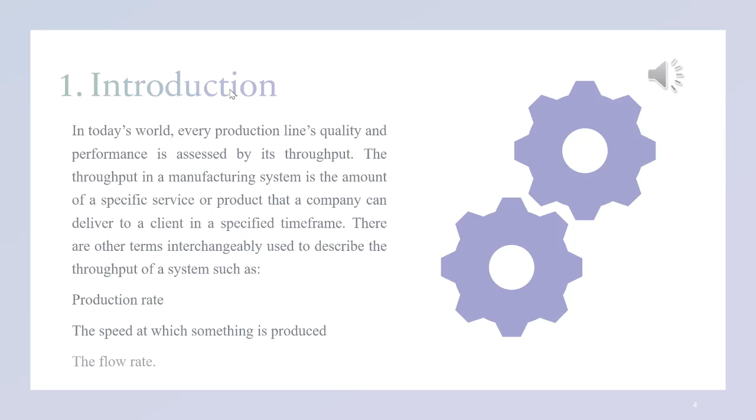The throughput in a manufacturing system is the amount of a specific service or product that a company can deliver to a client in a specified time frame. There are other terms interchangeably used to describe the throughput of a system, such as the production rate, the speed at which something is produced, and the flow rate.

Well, given that the goal of the production rate of a line is maximizing the revenue of the company, and it is crucial, Benjamin and I as a group decided to study the theory of constraints applications in production lines and try to present a new point of view in maximizing the performance of the line.

Here, we get to know different types of bottlenecks in a system as well as how to combine lean manufacturing and theory of constraints methods, using some lean manufacturing tools such as Kaizen, Jidoka, Gemba, TPM, SMED, and so on to identify and eliminate the constraints, and maximize the total output.

Now we are going to understand the exact meaning of throughput. Production capacity of a company is closely related to production rate, and a business manager can make a number of assumptions about the throughput of the system. On paper, a company can reach the maximum capacity, assuming that the line will operate continually and without any interruptions, but in the real world scenario, it is not possible.

Over the years, in a production line, machines will fail and need to be repaired. There will be changes in the personnel of the factory and the learning curve alters over time. There are always maintenance and overhauls needed after a certain amount of operation time, and there will always be some supply chain shortages in the line that will lead to wait time.

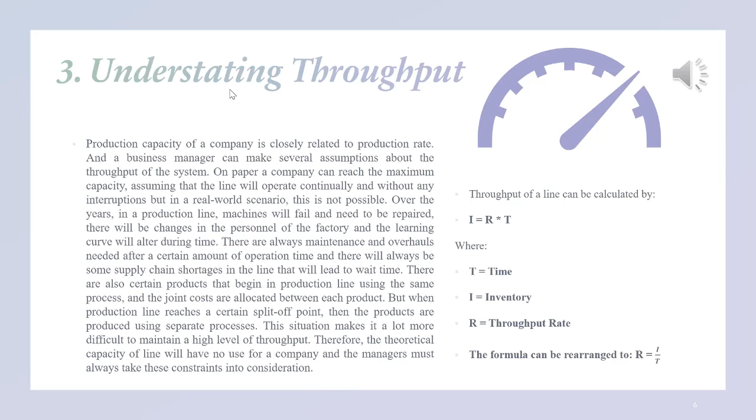There are also certain products that begin in the production line using the same process, and the joint costs are allocated between each product. But when the production line reaches a certain split-off point, the products are produced using separate processes. This makes it a lot more difficult to maintain a high level of throughput. Therefore, the theoretical capacity of the line will have no use for a company, and the managers must always take these constraints into consideration.

The key concept of this theory is that every production line has a single bottleneck, and the total production rate is affected by that constraint in the line. Consequently, when that constraint is eliminated from the line, the total line throughput could be improved. Thus, spending time on optimizing the non-constrained parts of the system is not very beneficial, and only improvements on the weak links of the system will improve the overall efficiency.

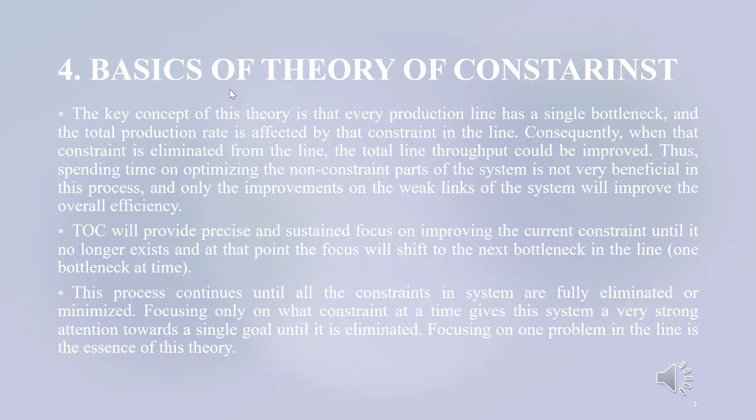TOC also provides precise and sustained focus on improving the current constraint until it no longer exists or is at its minimum state. At that point, the focus will shift to the next bottleneck in the line. This process continues until all the constraints in the system are fully eliminated or minimized. Focusing on only one constraint at a time gives the system very strong attention towards a single goal until it is eliminated. But first, we need to find out the main characteristics and also the benefits of TOC.

One of the most appealing advantages of TOC is that it always prioritizes the improvement activities, and in contexts that need urgent improvement of the line, TOC offers a very rapid method for improvement.

Continuing, if this method is implemented successfully and correctly, the following benefits will be achieved: increased profit, which is the primary goal of most companies; fast improvement, which is the result of full attention and focus on the most important bottlenecks of a system; improved production rate, since by eliminating the bottleneck from a system the throughput always increases; and reduction in lead times, since eliminating the bottleneck results in faster production flow and eliminates inventory.

And now I'm going to take a deep look at the theory of constraints. It is a methodology for identifying the most important limiting factor, I mean constraints, that stands in the way of achieving a goal and then systematically improving that constraint until it is no longer the limiting factor. In manufacturing, the constraint is often referred to as a bottleneck.

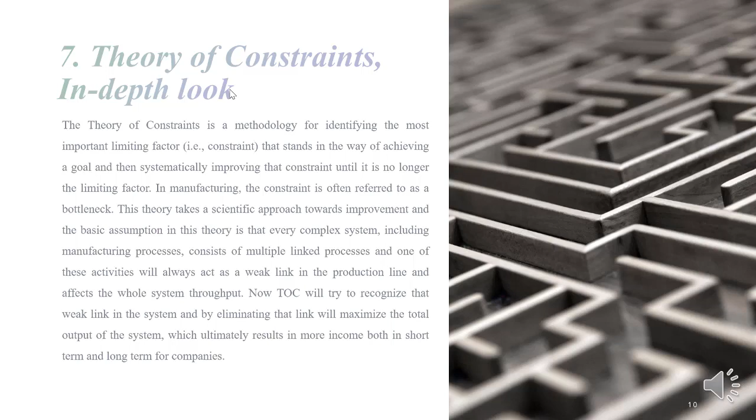This theory takes a scientific approach towards improvement, and the basic assumption in this theory is that every complex system, including manufacturing processes, consists of multiple linked processes, and one of these activities will always act as a weak link in the production line and affect the whole system throughput. Now TOC will try to recognize that weak link in the system, and by eliminating that link will maximize the total output of the system, which ultimately results in more income both in the short and long term for companies.

There are five steps focusing on theory of constraints. The first step is identifying the weakest link, I mean the most important constraint. The second step is exploit the constraint. It means that you can think about the most effective and quickest way to improve the constraint.

On the third step, we subordinate everything else to the constraint. It means that we need to review all of the activities of the line to ensure that everything is aligned with the constraint. And at the fourth step, we elevate the constraint. It means that if after all the three steps before, the constraint in the line still exists, then we need to consider further actions to remove the constraint. And for the final step, we need to repeat these steps again.

The sophisticated problem-solving method used in the theory of constraints is called the thinking processes. This method is optimized for complex systems with many interdependencies. They are designed as scientific cause and effect tools which are applied to first identify the root cause of undesired effects, UDEs, and then removing them without creating new ones.

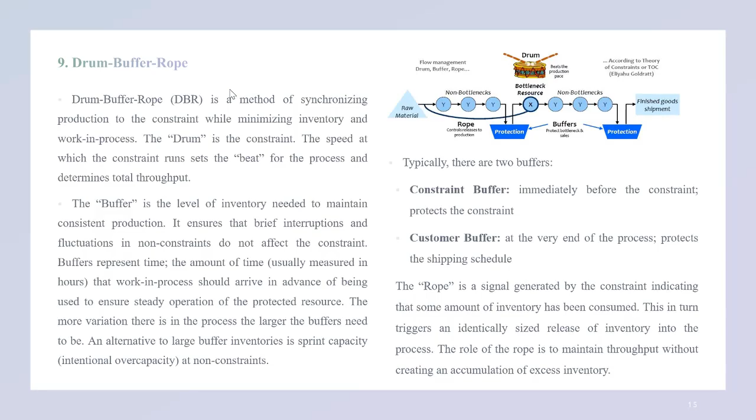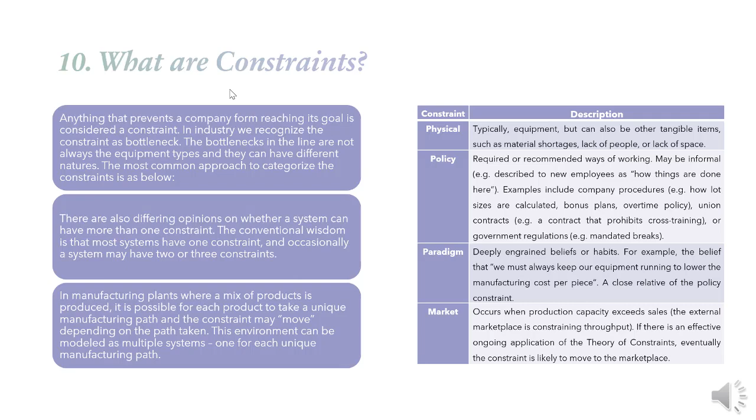Okay, anything that prevents a company from reaching its goal is considered as a constraint. In industry, we recognize the constraint as bottleneck. The bottlenecks in the line are not always the equipment types and they can have different natures. The most common approaches to categorize the constraint are as below. As you can see, it is physical, policy, paradigm, and market.

There are also different opinions on whether a system can have more than one constraint. The conventional wisdom is that most systems have one constraint and occasionally a system may have two or three constraints. In manufacturing plants where a mix of products is produced, it is possible for each product to take a unique manufacturing path and the constraint may move depending on the path taken. This environment can be modeled as multiple systems, one for each unique manufacturing path.

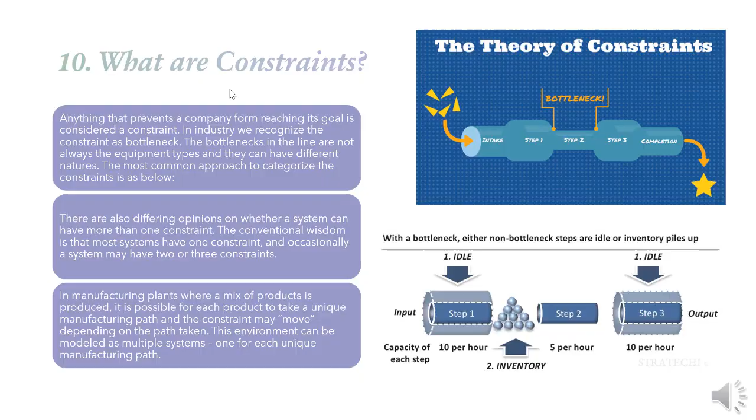Well, now there is an example of applying theory of constraints in reality. It includes 5 steps that I mentioned before, including identifying the bottleneck, exploit the constraint, subordinate and synchronize to the constraint, elevate the performance of the constraint, and repeat the process. The first step is identifying the bottleneck. In this step, the manufacturing process is reviewed to identify the constraint. A simple but often effective technique is to literally walk through the manufacturing process looking for indications of the constraint. The deliverable for this step is the identification of the single piece of equipment that is constraining process throughput.

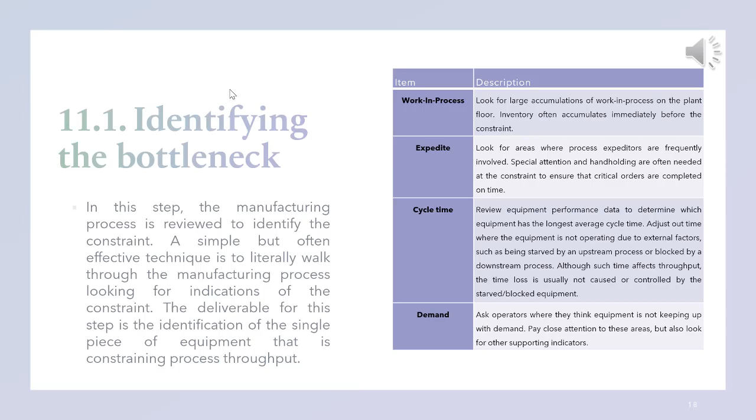The second step is exploit the constraint. This step focuses on quick wins and rapid relief, leaving more complex and substantive changes for later. The deliverable for this step is improved utilization of the constraint, which in turn will result in improved throughput for the process. If the actions taken in this step break the constraint, we jump ahead to step 5, otherwise continue to step 3.

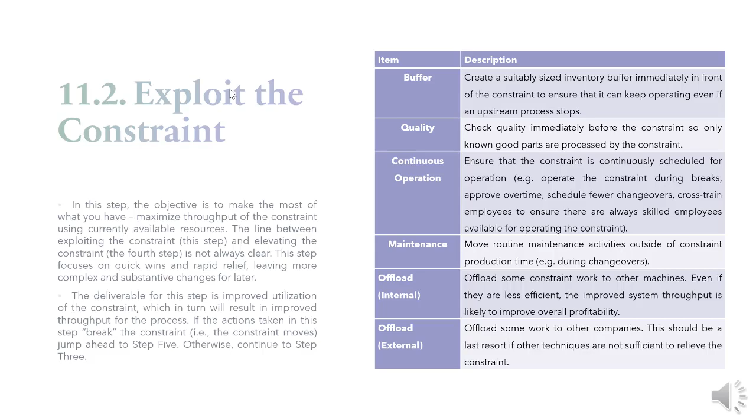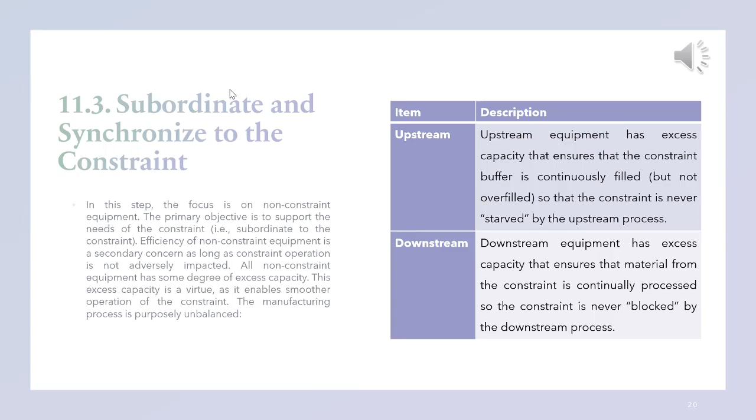In this step, the focus is on non-constraint equipment. The primary objective is to support the needs of the constraint, for example, subordinate to the constraint. Efficiency of non-constraint equipment is a secondary concern as long as constraint operation is not adversely impacted, all non-constraint equipment has some degree of excess capacity. This excess capacity is a virtue as it enables a smoother operation of the constraint. The manufacturing process is purposely unbalanced. Some useful techniques for this step include DBR, priority, sprint, and steady operations.

In step 4, more substantive changes are implemented to break the constraint. These changes may necessitate a significant investment of time or money, for example, adding equipment or maybe hiring experienced staff. The key is to ensure that all such investments are evaluated for effectiveness, and the deliverable for this step is a significant enough performance improvement to break the constraint. In the final step, the objective is to ensure that the 5 focusing steps are not implemented as a one-off improvement project. Instead, they should be implemented as a continuous improvement process.